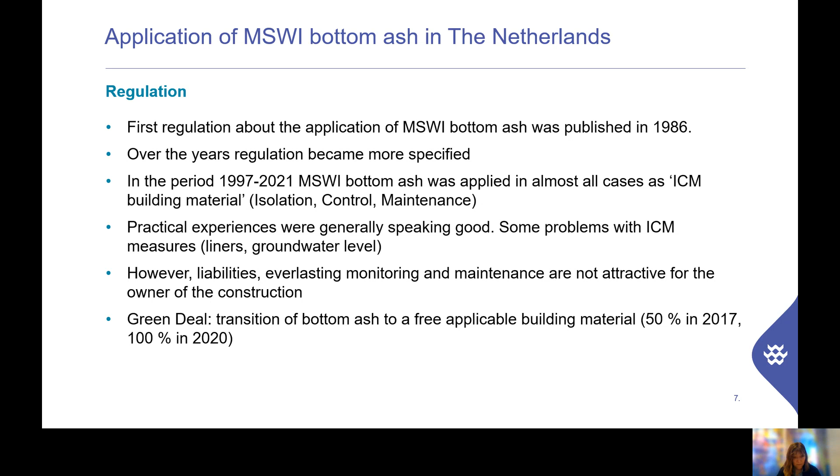Next to the applicability of the bottom ash, there was also an agreement within this Green Deal that more metals should be recovered from the bottom ash. So then I come to the applications. What type of applications are used in the Netherlands? Most of the bottom ash is applied in embankments. You can think of noise barriers, embankments for flyovers, bridges, where large volumes of bottom ash can be stored.

Another application is as an additive in products, especially for partial replacement of gravel or sand in certain concrete products. Another application is after immobilization by adding a cement-like material. These products are used in foundations for solar farms, roads, large industrial sites. I will show you some examples of these different types of applications in the coming slides. I want to emphasize that in the Netherlands, it's prohibited to landfill bottom ash, but it can be applied as building material in a landfill, especially as a support layer for the liner constructions.

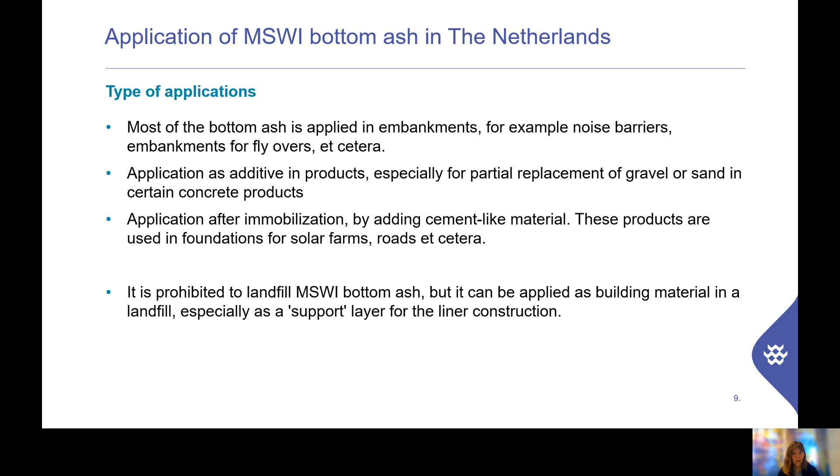Now, we have made an inventory of the type of applications of bottom ash in the Netherlands. This inventory was done for the period between 1986 and 2018. We were able to locate more than 400 locations where bottom ash was applied. Especially from the beginning period, it was not always clear how much bottom ash was applied, and we were able to get information on how much bottom ash was applied from about 330 locations.

We made a theoretical consideration on how much bottom ash could have been applied in this period in the Netherlands, and it was about 38 million ton. The total amount of bottom ash applied in these 330 verified locations was about 31 million ton. So if we compare those numbers, we were missing the information on the amount of bottom ash for 90 locations. So we conclude that we didn't miss large amounts of bottom ash, and that this missing information can account for the difference between the total amount we have verified and the theoretical amount of bottom ash that has been applied in this period.

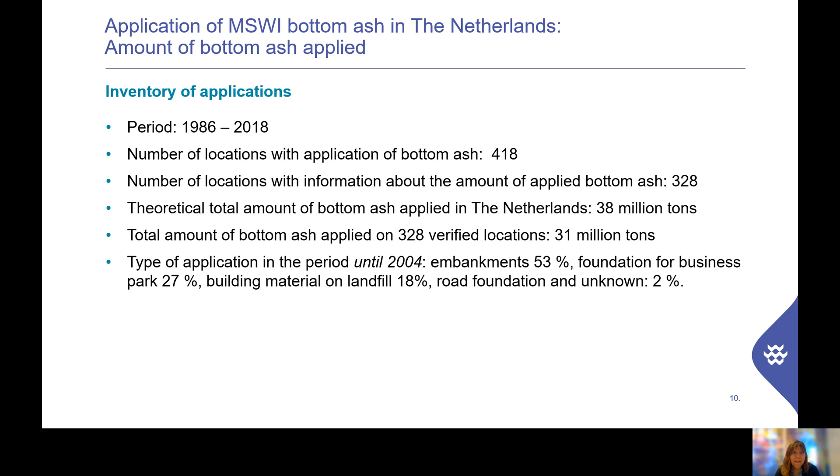Here I show you some examples of applications. This is an example of an embankment of a noise barrier along a highway. The highway is actually on the other side of the noise barrier, so you cannot see the highway in this picture. But what you can see is the construction of the isolation measures that are taken. The bottom ash is underneath this foil you can see here. So the bottom ash is completely covered with foil, and on top of the foil a soil layer is applied, and on the sides this soil layer also needs to fulfill certain permeability values and measures.

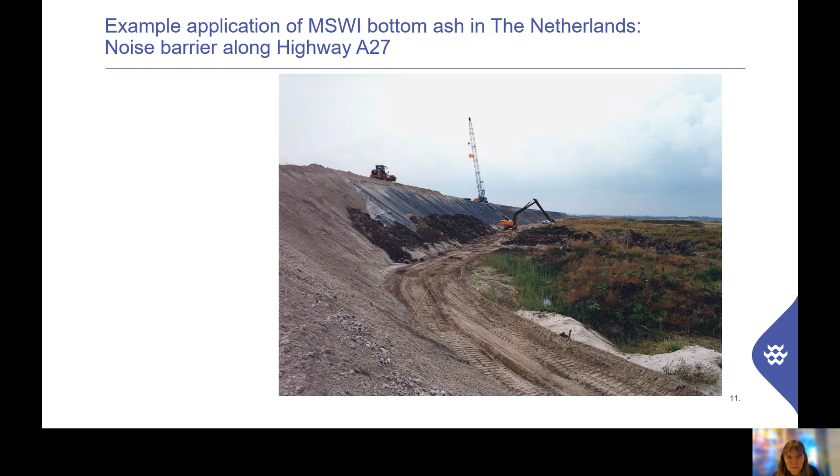A second very similar example, which is an embankment for the flyover at Highway A6 in the Netherlands, which is visible here. Actually, this embankment is already in place, so this is how it looks when everything is ready.

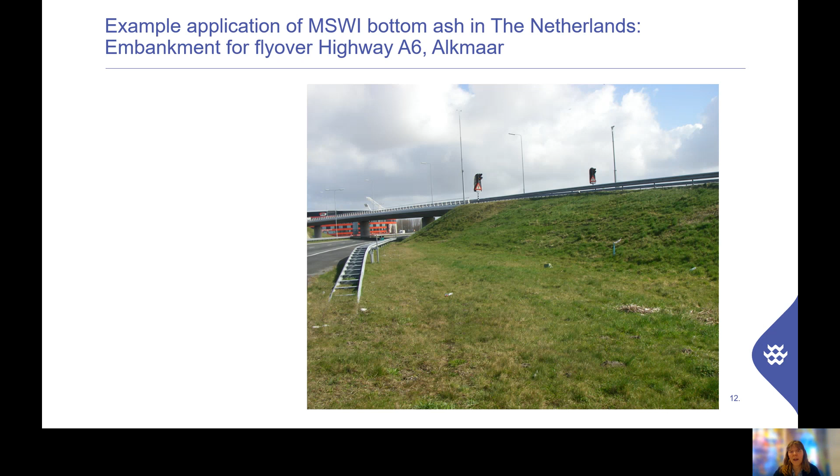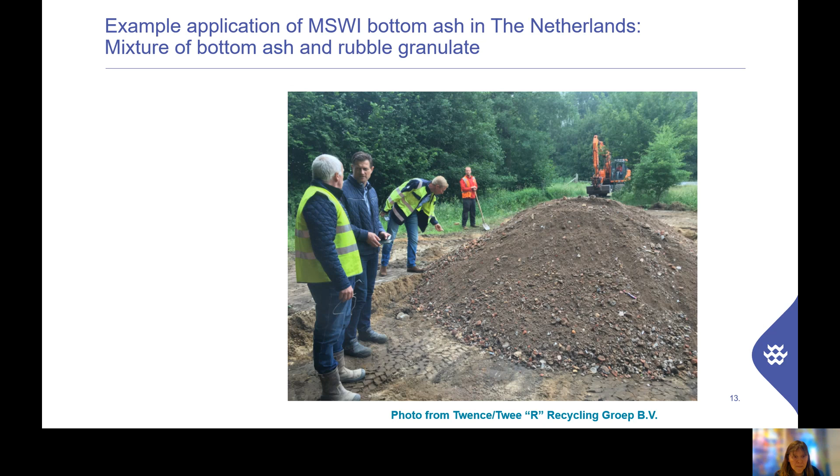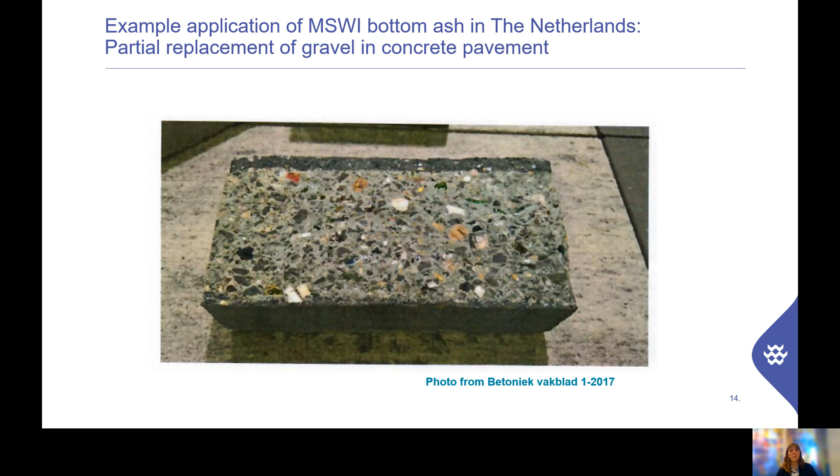Another example of an application of bottom ash in the Netherlands, which is shown here. This is a mixture of bottom ash with rubble granulate, which is used for roads. And here they are working on the construction of the road. Another example of application of bottom ash is a picture from pavements. Here the gravel is partially replaced by bottom ash, which you can see on this picture of this concrete pavement.

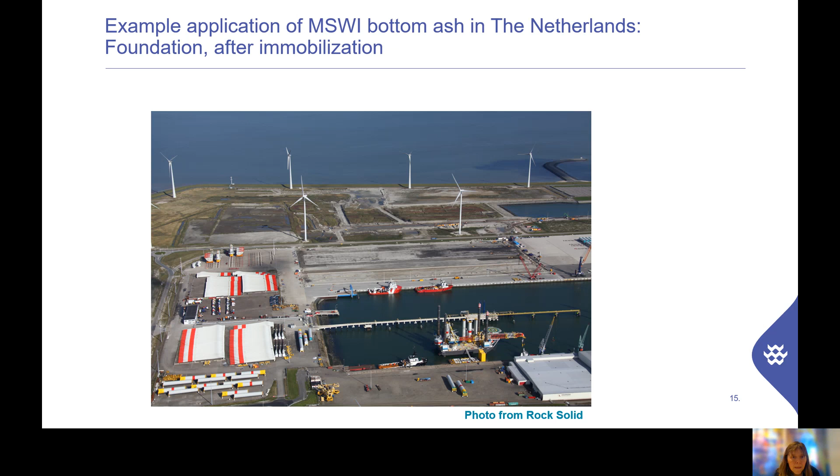Then I'm going to the case study. The N33 is a provincial road which contains two lanes where traffic can drive, and there are plans to broaden the highway to 4 lanes. So they're going to reconstruct the road. Near Appingedam, which is close to these curves in the road, there is an embankment to a bridge, and this bridge is going across the Eems canal. And in these embankments, bottom ash is applied. Because they are going to reconstruct the road, there is a question on what they have to do with this bottom ash. The embankments were constructed in the period of 1989 and 1990, and about 150,000 tons of bottom ash was placed in these embankments.

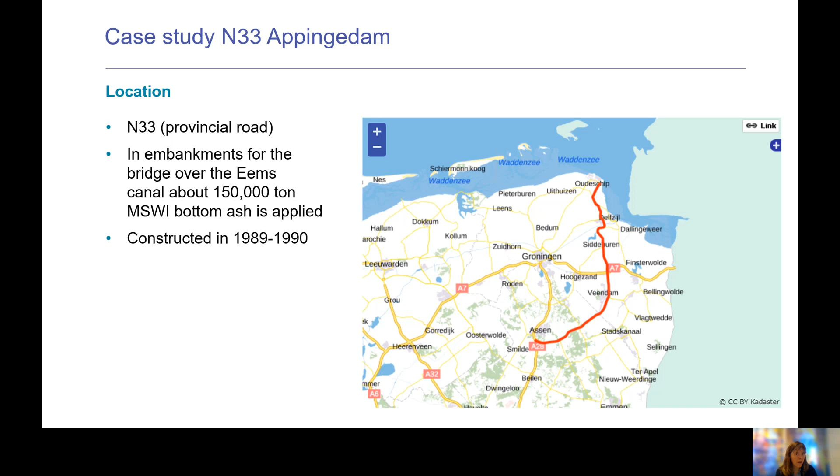Well, what were the objectives to study this application? In case they need to reconstruct the road, they need to know what the quality of the bottom ash was, environmentally, but also civil technically, because they needed to know what the options were for the bottom ash, where it had to go. There was also insight needed in the application options when this bottom ash would become available during the reconstruction works. And next to that, they wanted to know the quality of the top soil layer, such that they could judge if this layer could be reused.

They also would like to determine if the soil underneath the bottom ash was influenced and if the groundwater quality was influenced, because in case they decided that the bottom ash could stay in place, they needed to know this information. And also for the reconstruction works they were planning, a quantification was needed of whether natural solidification had occurred. So in order to investigate these objectives, we have performed an investigation.

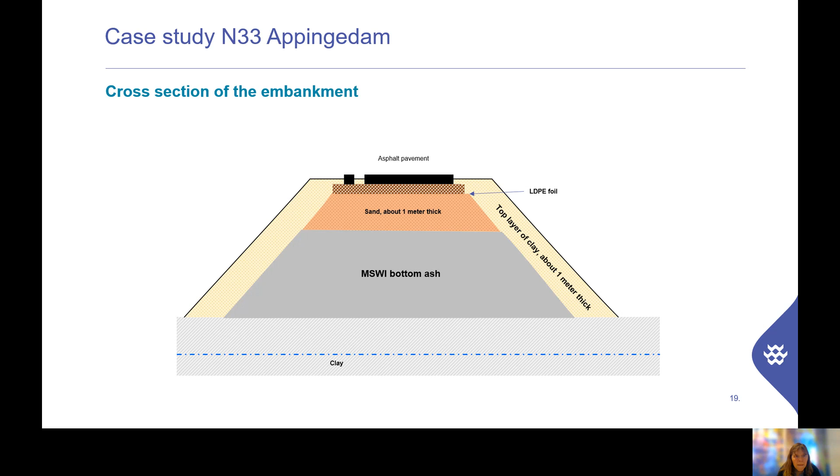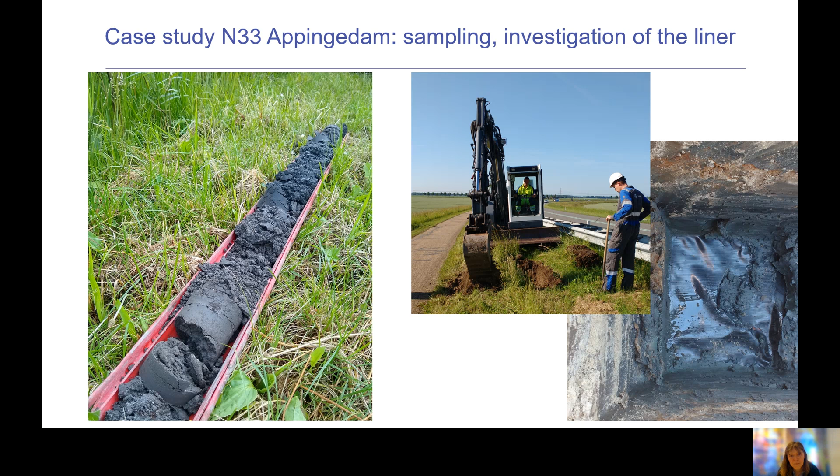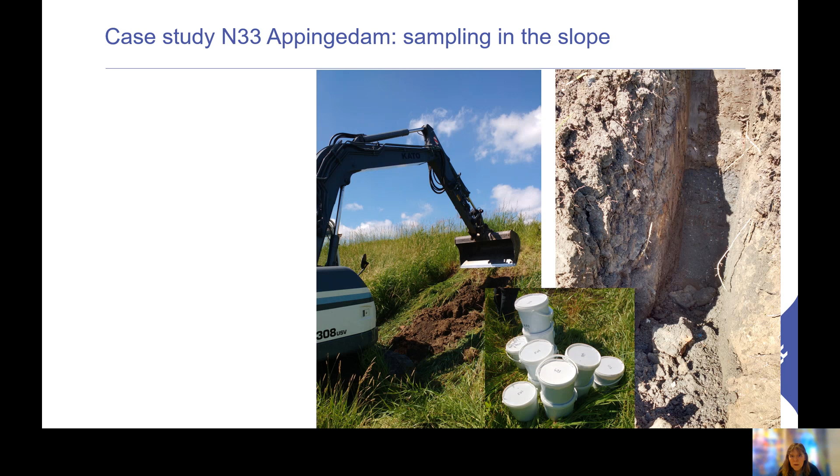I'm showing some pictures of the fieldwork we have performed. So here is a picture of the liner, which is taken through the application, and on the right side you see the excavator. This is a picture taken inside the dug hole, and you see here that the foil is really present and still closed. This is a picture from the sampling in the slope of the application. You see here the bottom ash and all the samples we took.

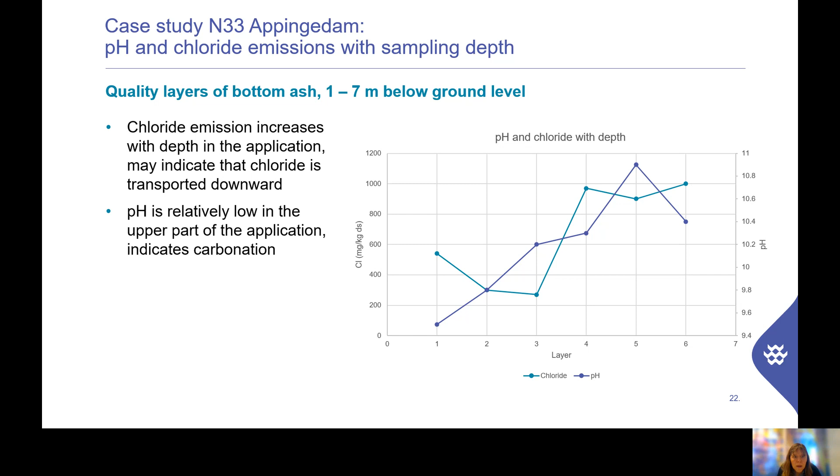And in the layers more in the center of the application, the pH of the bottom ash is higher. And for the lowest layer, we see that the pH is a bit lower than inside. And this is probably due to the reaction with CO2 from the soil. So weathering of bottom ash results in general improvement of the quality as metals are fixed. This is not valid for sulfate and antimony. I will show that in the next slide.

Here you have the emissions determined in a column experiment. We see here that chloride, sulfate, antimony, copper, and molybdenum have emissions on the norms for the isolation, control and monitoring applications. This more strict norm is for freely applicable bottom ash. So you see that some parameters even fulfill this stricter norm, but only the parameters I just mentioned,

they are not. We see that the emission of antimony is relatively high, and we see that the bottom ash is weathered, and also that the leaching of salts occurred, as the chloride concentrations are relatively low.

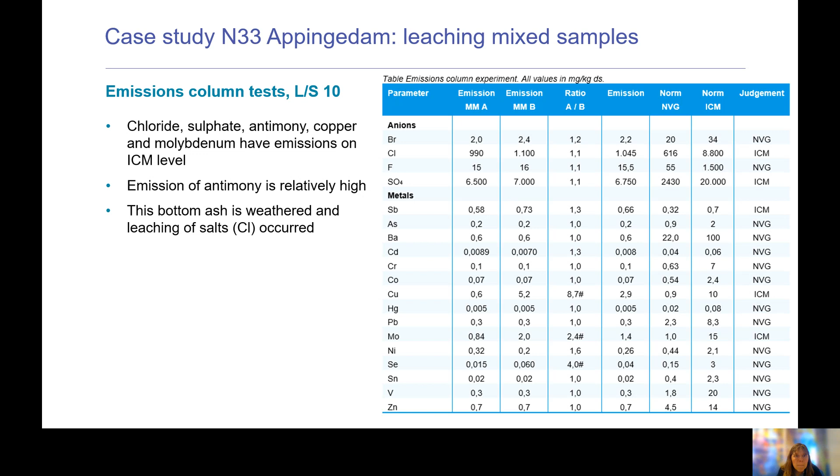We've also performed anaerobic column experiments because field measurements indicate that anaerobic conditions were present in the embankment. We conclude that the results are comparable with the standard aerobic column experiment. However, the emissions of chloride, fluoride, antimony, copper, and selenium are lower because in anaerobic conditions, these elements are more bound in the system.

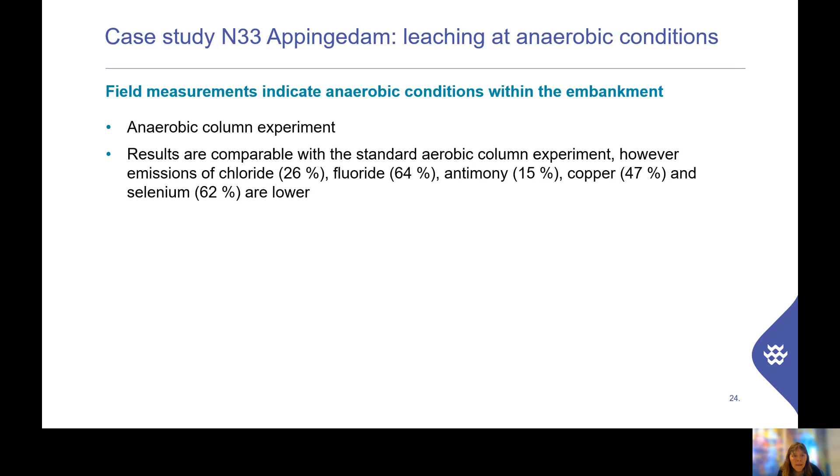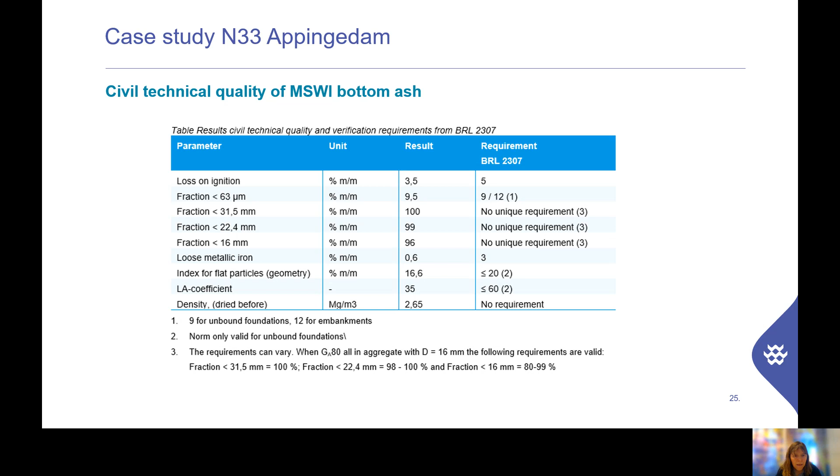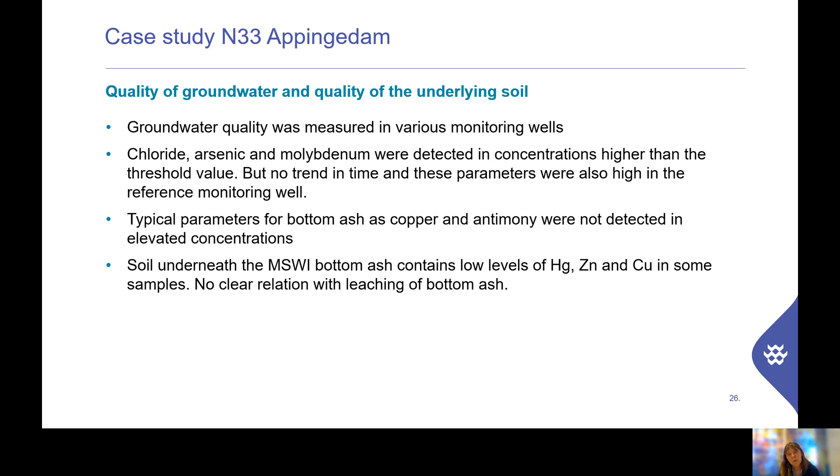So also for the soil underneath the municipal solid waste incinerator bottom ash, we concluded that low levels of mercury, zinc, and copper were shown in some samples, but there was also no clear relation with leaching of bottom ash visible.

So to conclude, we have investigated this application of bottom ash near Appingedam. We determined the quality of the bottom ash, and after 30 years of use, the bottom ash still has the quality of an isolation, control, and monitoring building material. Leaching of antimony has probably occurred. Also, the civil technical parameters were still very similar to the ones we expected.

And also, within this application period, no big changes occurred in quality, and it can be applied in a similar way. We have no clear observation that there was contamination in the surrounding environment. We also had a goal to see if natural solidification had occurred. We conclude that it probably will not give big problems if part of the bottom ash is removed. Probably the inner part of the embankment is more solidified than the outer part, and we have sampled both inner and outer parts, but we think the solidification was reasonable.